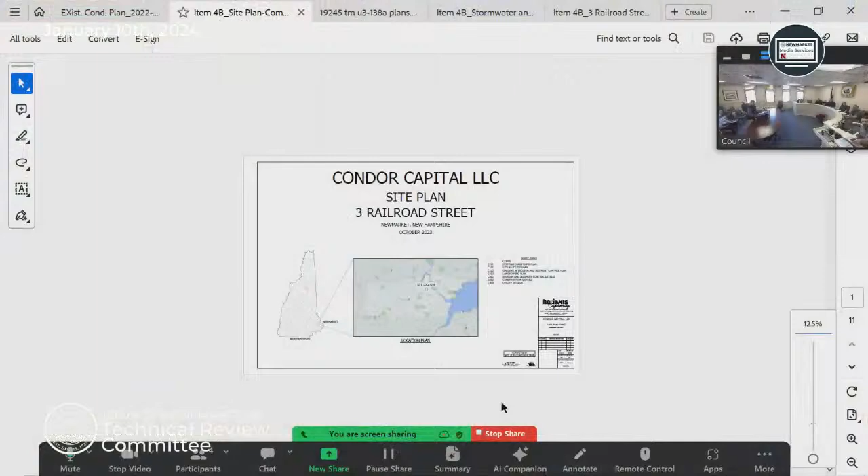Okay, again, I'm Brian Hudock with Horizons Engineering. So, yeah, thank you for the introduction. So, just quick recap. Effectively, we are proposing one new 3-story building that will have 41 one-bedroom apartment units and commercial space on the first floor. The commercial space will be used for the Horizons Engineering office that is currently operating out of the existing office building on the property.

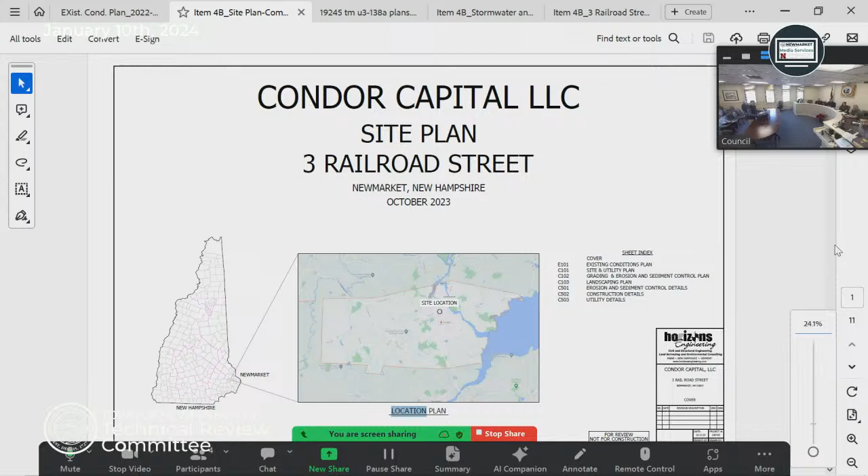As part of the development, the existing brick building will be removed in favor of the new building and parking area. So I think it's a very well thought out plan to optimize the space and account for all the various considerations. So we are compliant with all applicable zoning regs. There were previously approved variances in place to allow for the proposed density and number of parking spaces.

And as part of this, we are requesting a special use permit to allow mixed use within the M2A zoning district. And the special use permit has specific criteria, and I think we pretty well meet those criteria with our fiscal impact analysis, our market analysis, and the two other criteria, which is the parking and density. So I think it'd be an overall benefit to the community from those standpoints.

From a site design standpoint, we try to best work with the existing topography. So the building, while it is 3 stories, it's much lower than the surrounding roadway there on Main Street and on the upper part of Railroad Street. Some of the architectural renderings show that a little more visually. And then we also try to be thoughtful with how we orient the parking and the site design, and we've done outreach with the abutting property owners. And one of the comments, for example, was the reason that the drive approach is angled like that was to reduce off-site light pollution onto the abutters' properties.

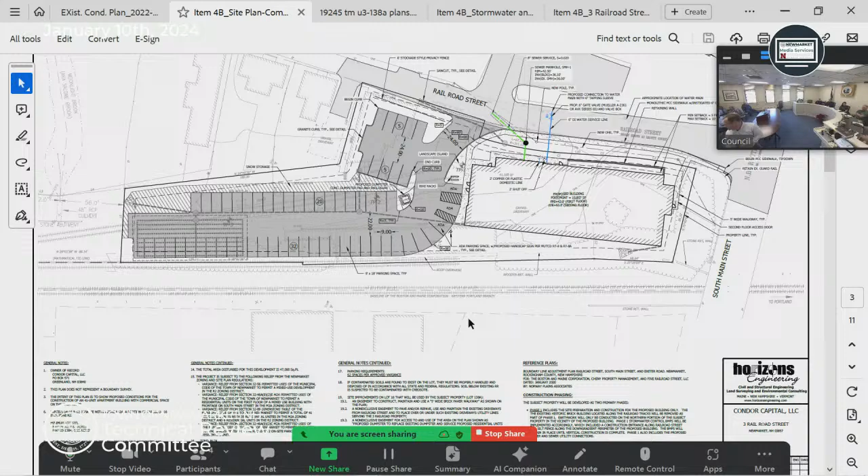Thank you. If you go to the elevations? You can go to the floor plans first. They should be the first architectural exhibit. Perfect. So on this overall floor plan, you can see we have our first floor and second floor, which is typical of the third floor plan as well. On our first floor, we have three primary entry points on this building.

One being on the parking lot side for the residential primary entrance. The commercial space will be accessed off of Railroad, and then our stair tower has an access point to the upper level of South Main Street. The idea being that this building has easy pedestrian access to downtown, knowing that parking is sometimes an issue. It was important to us to provide a stairwell access for residents to have a shorter walking distance to downtown, while primary vehicular access would be from the parking lot.

So visitors and things like that obviously would be using the front door, but for convenience, there's a second access point on South Main Street. Our commercial space has its primary entrance, as well as shared egress through the stair that accesses South Main Street. So the commercial space will go from its lower level up a half flight and then out to the South Main Street side. On the upper floor, it's purely residential units with utility space.

Our first floor has a utility space, which will likely be the water room with secondary electrical room in that space, accessed directly from the exterior. We'll be working with a sprinkler engineer, mechanical engineers and electrical engineers to further size those components, but that's where the allocated space is. First floor utility will be the riser room, electrical, mechanical. Yeah, separated as required, but yes. Then you can continue to the next page.

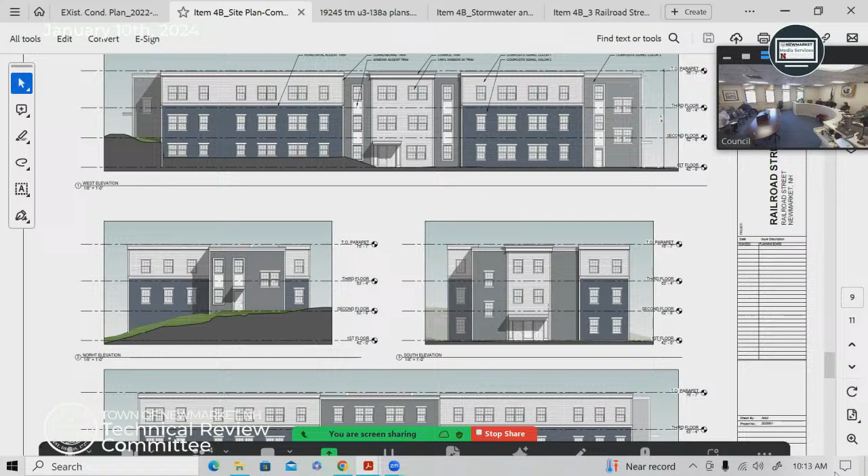We'll have to look at that. So it'd just be a new service off the main to a new hydrant. You're running the line already, you just put a T there. We may have to look at that, they'd be right next to each other. Off the fire service? Oh, we can't do that. That's one thing I looked at. It's a dedicated line.

Yeah, it's a dedicated line, and one of the other issues I saw is you actually ran your water service off that line. And you have to run a separate water service. So the water service actually has to come off the main, have a shut off at the property line, and then run to the building. It looked to me like you had it coming actually off the fire line, the water service. It was 2-inch.

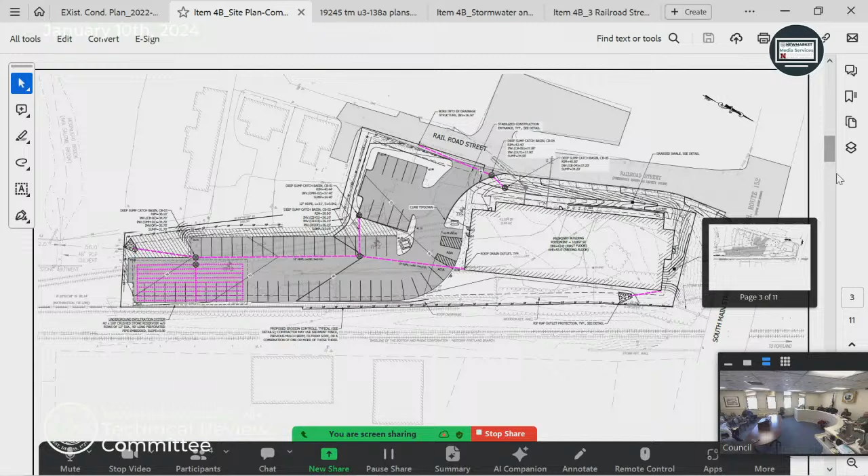Well, if we can just do architectural and then we'll get to that. Our understanding was to be a single 6-inch to the building that would manifold for fire. Right, that's what our last plan was, what was approved. Yeah, I know. Yes, you can't, that fire line has to be dedicated for the sprinklers. So you can't tap off it.

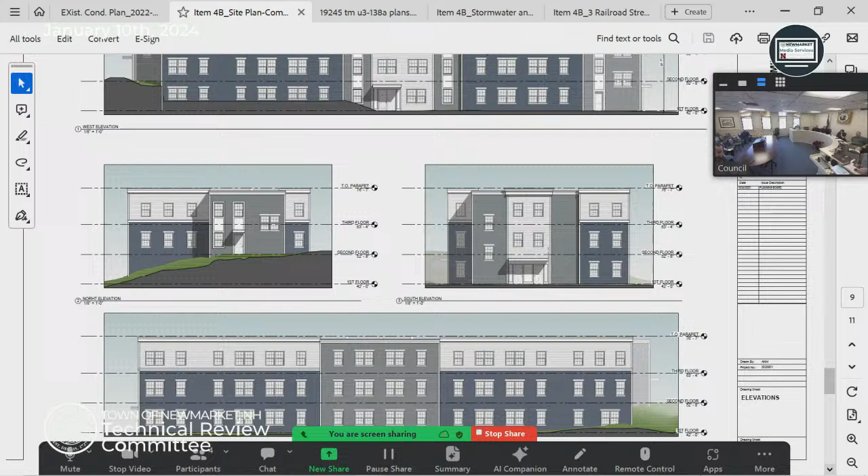Architecturally, our primary entrances have a similar language with a hierarchy of the primary entrances and then the pedestrian entrances being scaled differently. The rear of our building, which would be the railroad side, has a similar architectural language as the balance of the building, with the idea that this building will be visible on all sides. However, there isn't a primary entrance on this side, so it doesn't incorporate the exact same features that our entrances include. And if you have any other architectural questions, we'd be happy to answer them.

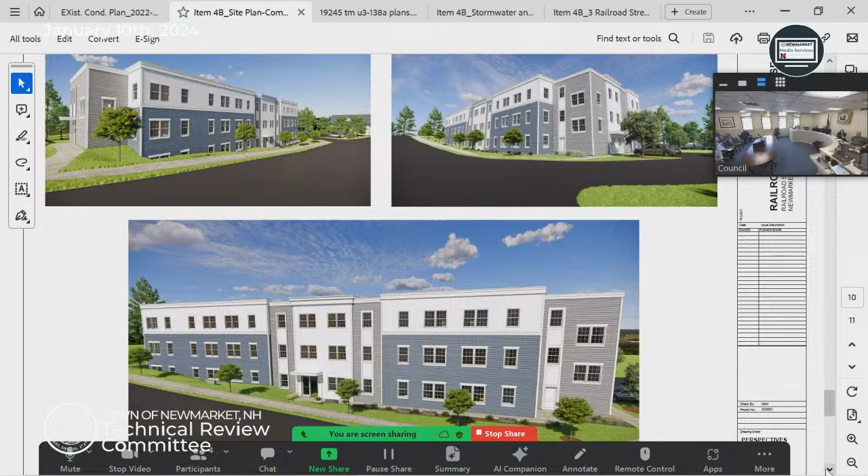And that main entrance from the commercial side is gonna go out towards your driveway for access. Correct. I guess we'll start in the room. While we're on the topic of water, we'll keep on having that conversation.

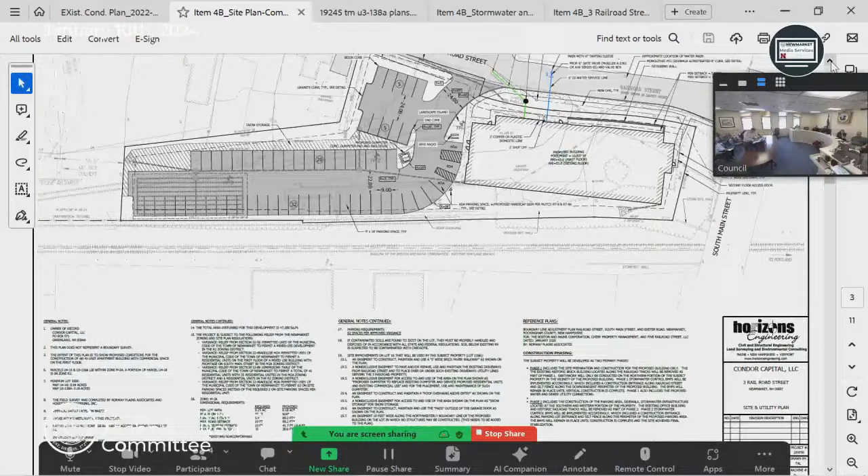So history on this side, we originally had an 8-unit approved here, and we were going with the same water sewer setup that was previously approved, but if you prefer having two water lines come in... It has to. Okay, that's not a problem. We can get that revision done really easily. Yeah, that's pretty simple. The fire line has to be dedicated to the sprinklers, and that's it. Exactly. And that's the problem, if you run a hydrant off it, you're drawing water, and water may not be getting to the sprinklers.

So with the discussion of adding a fire hydrant, we are gonna be adding a new walkway all the way up here. So we're more than welcome to work with the town while this is all dug up. It might be a good time for the town to add additional water lines down if they want to. Because we're bringing this walkway all the way up to this corner, so it'd be right across the street. This is gonna be all dug up.

So your sidewalk is at the curb line? We're bringing the sidewalk all the way up to South Main Street right here. From your driveway, it comes all the way down to our driveway. Along the paved road? Correct. So it might be a good time while all that's happening to add something like that. I have a question about that sidewalk, if you guys want to talk about it now. Sure, that's fine, Jeff.

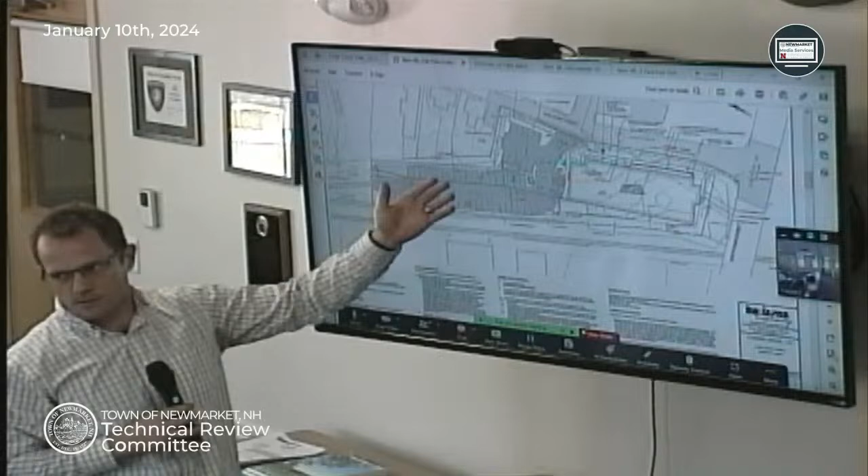Right. We were wondering about the office employees and visitors. I know the number of spaces is set, so that's not in question. But how many office employees are there? There's 6 office employees. Will any of these spaces be dedicated to the office, with signs? No. What we've talked about is we might put up some signs right here that say visitor parking from 9 a.m. to 4 p.m. But the second we start assigning spots, it becomes horrible. So the thought is, tenants are going to go to work during the day, and then the commercial space is going to come in and they can use those spots. Okay. Yeah, that was more of a question. Yeah, I think it'll be a good complementary use of parking. Okay.

Snow storage. There's not a lot of snow storage there. I just thought a note should be added to the plans to indicate removal off-site if necessary once it's at capacity.

Talked about truck turnings. If there's any pads for transformers, generators, HVACs, those should be shown on the plans. It's noted the bike racks are on a grassed landscaped area. I didn't know if that was intended that way or if you wanted the bicycles on like an extension of the sidewalk. Nothing in the regs about that, just a note. If there's going to be a sign, like for the overall building in Horizons, you should show the location of that.

Water and sewer services, I just noted we're deferring review until we have more information. Fire hydrant location, I noted coordinate with the fire chief. If there will be underground electrical or natural gas or any other utilities, those should be shown, even if it's subject to change. Yeah, no natural gas in Newmarket, so. Okay, you do propane, oil. Some towns. All okay. Electric.

Yeah, that's a good question. So, as you pointed out, the building's going in first, and the parking lot follows that in phase 2. So while the building is going in, luckily the footprint of the building is over a fair bit of existing impervious area. It's kind of hard to see on this, but on our base survey, a lot of that area, there's like a big gravel pad. So the building is not contributing a significant increase of impervious while it's going in first. But to your point, we can prepare like an erosion control plan and do some temporary BMPs.

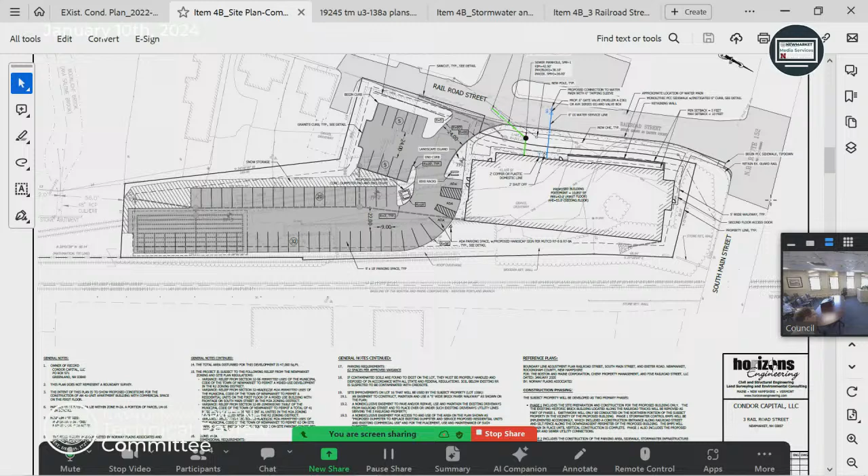Yeah, and with that said, I will do a calculation in-house, but my guess, so there is a shed down here that's impervious that's going to be coming out right away. I bet we are very, very close to keeping impervious the same exact amount during construction. We're happy to rip up the pavement while we're under construction. One thing, talking with the neighbors when we met with them the other night, is they're happy that this building is staying during construction because it's going to be a buffer for them, so they don't have to deal with noise and just seeing construction. Okay, I just wanted to make sure that there's somewhere for it to go before the underground is built.

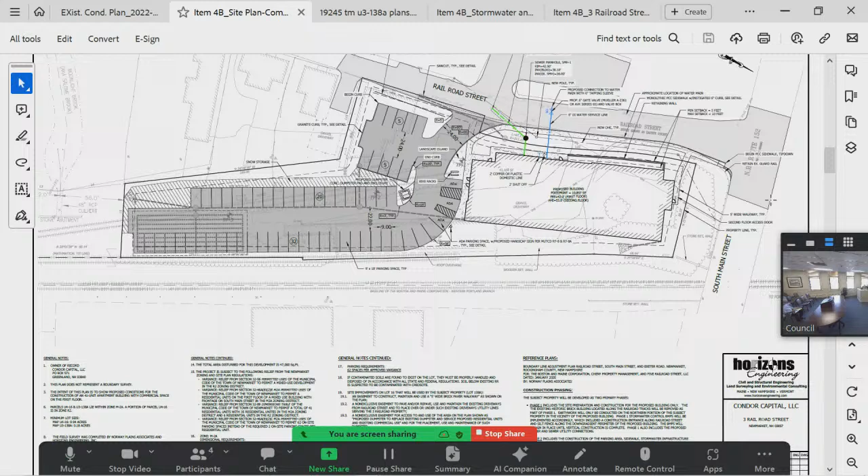Yeah, I want to piggyback on that too, because that was one of my comments. Some sort of like temporary sediment basin, because during construction, while the impervious surface may be the same, it's very different when it's exposed soils. So that shed area, the shed's gonna be taken out, and that could be a temporary sediment basin, just making some notes that stormwater from the active construction area could be directed to that during construction.

Yeah, definitely. We can make almost like a dedicated construction erosion control plan that just shows the construction phase items and BMPs, not all the other details, just so it's kind of clean. And we can also support it with some calculations too, with the impervious area. Okay.

Let's see, some more things about notes. Notes about dewatering, it says you have a perched water table in there. I suggest a safety barrier be added to the corner of the parking that has a 2-to-1 slope. I'm not saying a guardrail, but some sort of safety barrier. Is that that last space in the southwest? Yes, right there. I was gonna say right by the underground basin. There's just a little corner of 2-to-1 slope that starts right at the pavement.

Yeah, I think we have a fence called out. Okay, oh, that's true. I didn't have the landscaping plan until I got here, so maybe it already shows it. Yeah, there's a fence that comes all along here, and then it's gonna shoot up this way too. And then I believe there's a fence straight across here to block any light pollution from people pulling in, going out onto these neighbors. And then there's a fence right here as well. How tall is the fence? So there is a 6-foot fence called out.

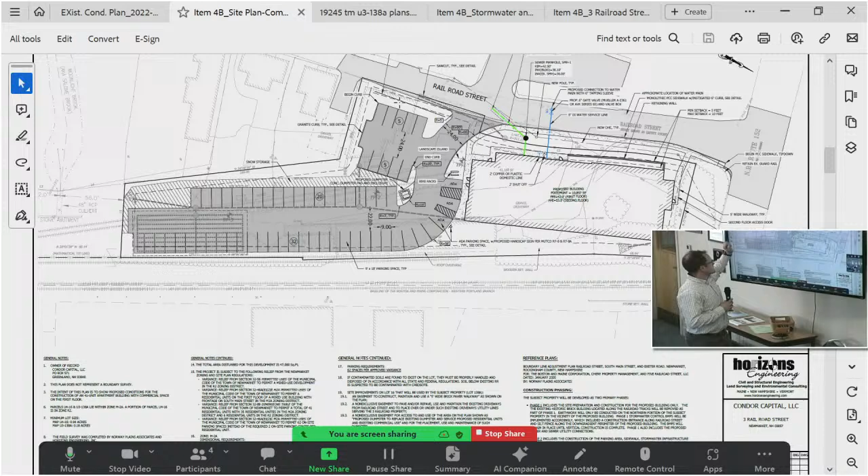Or it's probably, do you have the landscape in this? Oh, this is right. Okay. This is a 6-foot vinyl fence right here. I believe it's, I think it's a 6-foot all the way. I think it's the same from what I recall. I don't think there's two different.

4-foot-high black vinyl-coated chain link. This one? Is it all the way around? So this is 4 foot with shrubs, and this is 4 foot with no shrubs, you said, here? Or this is 6 foot high here? This is 6 foot, right here. Okay. Yep. And then this is 4 feet, yep, that goes all the way around.

Okay. Yeah, so the goal with this one is just for light from tenants, so it doesn't go into these backyards right here. And the same with this one right here. To Allison's point, though, the fence doesn't go around that. I know it's also a snow storage area, but it's a steep slope, so bollards or something that can prevent. Yep, that's a good idea. We'll add that. Okay, and then the rest of my comments on the plan set are minor, and I don't need to bring them up now.

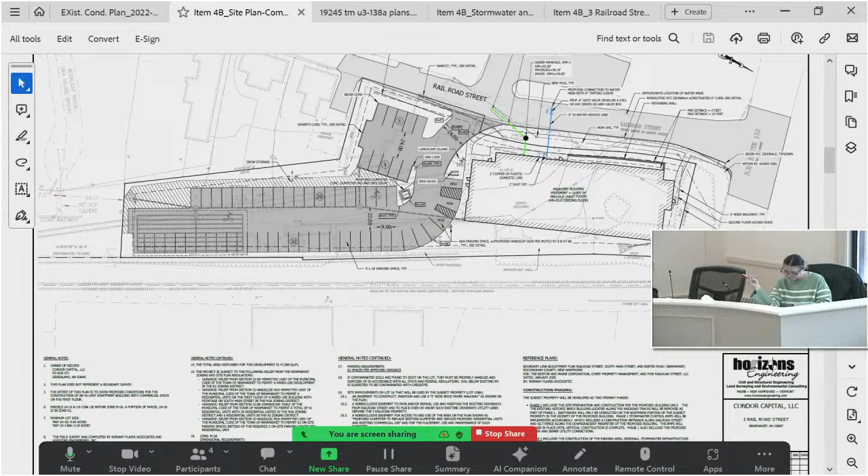The stormwater modeling, please provide more information about pollutant removals. I think you had like one sentence in there, and that was it. Show the flow paths on the subcatchments. I haven't actually really finished looking through the stormwater model yet. I can add a few preliminary comments on that. And I was asking for some pipe sizing calcs for some of the discharge pipes.

I saw that the test pits weren't super favorable, but at least I did see that where you have the underground infiltration, that test pit was one that didn't have that barrier. Correct? I only had like a few minutes to look at it. Yeah, I'd have to look at it. Off the top of my head, I can't remember. And I'll look at it more too. But yeah, we can address that in the report and vet that out so we can provide more information to show that it's adequate.

Okay, and I did see you're proposing a municipal storm connection, so you'll need to request a waiver for that. And that was it for the bigger comments I had. Yeah, while we're on the drainage piece too, the connection to the existing storm drain out there, really need to have some more information on how that's gonna work and confirming capacity. There's no information about the size of the pipe or anything there.

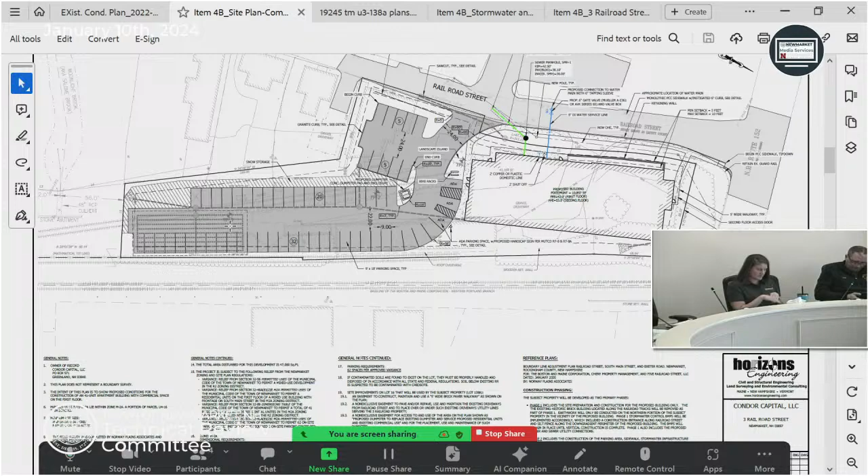And a sort of minor comment, but I feel the need to say, the little riprap apron that's shown at the end of that outlet that's going down the stream, there's no information on what the invert of that pipe is to show how steep that is. You're probably going to get some significant velocity when you do have the higher flows coming out of that, and that apron is supposed to be running parallel to the pipe discharge, so it doesn't discharge out the side of the riprap. Yep, just maybe a graphical thing.

Okay, yeah, drafting, but just making sure that that represents and actually fits within the property. Okay, yep, we can provide more details on that and some flow calcs for that discharge point. Or I got a couple questions on drainage. Now's an appropriate time if everyone else is set. Absolutely. Go ahead. So, it's the same area.

My concerns in that corner are, obviously, it was already mentioned that the grading crosses the lot line, but it also appears to go into the pavement of that neighboring property. And presumably the water must flow off that pavement, maybe around the end, and you're kind of blocking that corner, so it may cause water to flow out across that neighboring parking lot.

And then the discharge pipe that they were just discussing, it comes out kind of parallel to the slope. It doesn't seem to me we have enough contour information to know when it breaks down towards the stream over there. Is the water going to come out of the end of that pipe and then flow perpendicular to the slope and right down into the parking lot on that neighboring property, or is it going to continue on to Moonlight Brook? It's going to continue on to Moonlight Brook, and we can provide some additional detail on that discharge point.

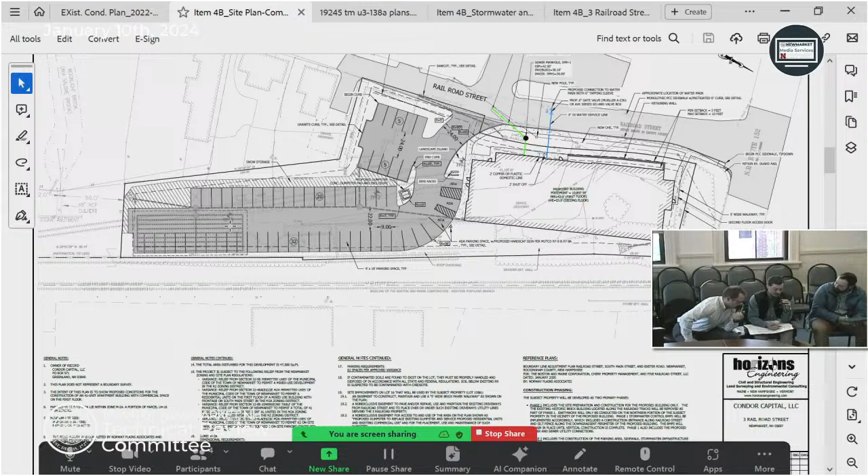I think maybe the drafting, the 2D layout is a little misleading there. And you're right, we don't have contours showing that area, it's kind of the limit of our survey, but we can provide some additional info. But basically, it starts going down towards the brook beyond that point. And just last point on that discharge, it's almost like an emergency discharge. It's only for the higher storm event, I believe just for the 100 year. So it's not something where we'll see water very often.

And then to your first point about the driveway, I think there are some lines on the plan of existing conditions, and that might have just been a CAD oversight. But the driveways are on the opposite side. Those are like the backyards, so to speak. It's just kind of grass landscaping back there. I believe that's not parking for that multi-unit building there? No, it's not. I can update the plan and make that more clear. But I can see how it looks that way. Yeah, aerial imagery makes it look that way. This is the plan saying edge of pavement right there.

My other drainage question is at the northeast corner of the building. There's another riprap outlet, and there's no pipe sizing or what's the source of that pipe that's coming out of the northeast corner of the building? That's just roof downspout. Is it a substantial portion of the entire roof that would go out the same outlet? No, I don't believe it's the whole roof. Let me check. We delineated the roof drainage, and we can show that on the updated plan, basically the stormwater flow directions off the roof and how much of it goes to that downspout. So we can provide additional information on that downspout.

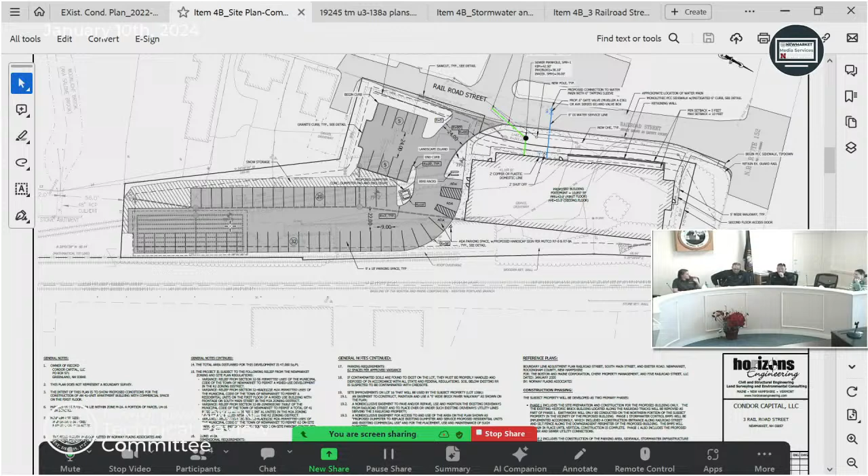And if you have any suggestions on this fence. I like the idea that you have a fence. There's nothing there now, so it's open. Prickler bushes would help prevent it. Yeah, plant those. I think that's a good idea, probably the best you're gonna be able to do. I wouldn't be a fan of a gate. If it's not gonna be locked, I think it's gonna be a problem. Okay, don't do it. It's an invitation. Make them have to walk around and really work to do it. I like the idea that you're putting that walkway to South Main Street, so that might alleviate some of the desire to cut through that way.

No problem, a gate just costs more for us. Our thought is, this is all grass area back here, so if anyone has a dog, this is kind of gonna be the area to get the dog out to go to the bathroom. We don't have it called out, but we're gonna put a pet station right there, and that's where the dumpster is gonna be, so all the pet waste can go right there as well. Okay, all right.

Yes, thank you, Chief. Yep.

Abby, any questions? Just on the dumpster, it's not gonna affect any of the parking, just for tenants? No, or just the access? The dumpsters we're using, what the dumpster company will have to do is come physically pull it out. Okay. It's a rolling one, and they'll bring it down into the parking, pick it up, and then move out. It's not like they have to pull in and do a full dump one. Yep. And again, the neighbors were happier that we were doing those ones because it turns over a lot more, instead of having a larger dumpster that can sit there a little bit longer.

Is the only communal space out back, is there anything internally as well? There's nothing internally, no. Okay, so that'd be the primary area people would interact outside. Correct, yeah, and I think the real goal for this is kind of why we added the door up here: you're walking distance to downtown. You can walk, it's trying to activate downtown more. So this is more pet, we might throw a couple picnic tables up there, but the real goal is to continue to activate downtown. Thank you.

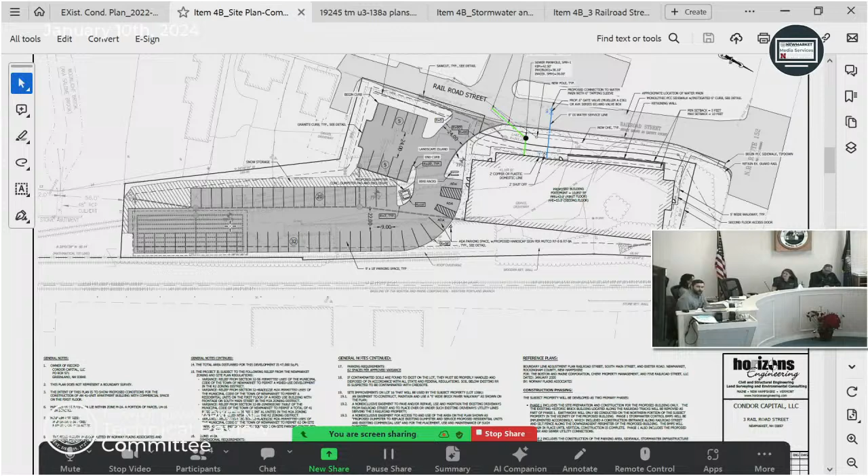No, I think we covered mine. Okay, Rick? All set? I'm good. Allison, any final thoughts? No? Eric, any final thoughts? Nope, I'm good. Great. Jeff? Bart. Oh, yes. Actually, hey Bart?

Yes, here. I do have one thing, we didn't really talk about it, but just so they're aware, when I went through the information before the planning board meeting, the traffic study was done by a company out of Maine, and you're gonna need to make sure there's a New Hampshire PE stamp on that. So they're also New Hampshire, they just stamped it with the wrong stamp, so they're going to put the New Hampshire stamp on it. Thank you. Great, thank you, Bart.

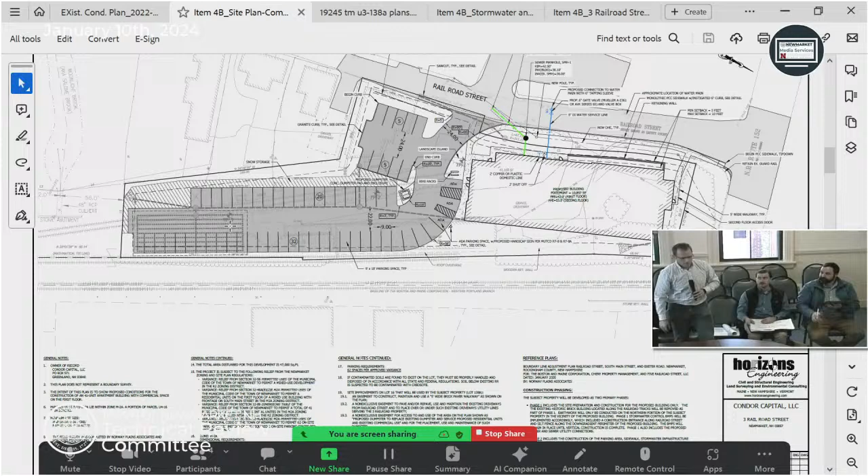Jeff, any final thoughts? My only final thought would be that the commercial space is going to be fully usable by the time they need to tear down that other building. Other than that, I'm all set. Thanks. Yeah, our thought process with that is to phase the occupancy. So we'll go for a certificate of occupancy for the commercial space. We'll have all life safety in place, and we can start to move over the commercial space during that. And then we will demo once they're in, and it won't disturb the commercial space.

So just like an updated sequencing plan. Yeah, and we can update that. I think that's going to be the best way. We're going to put a lot of our construction time onto that commercial space to get it complete as soon as possible, so we can phase into the demo of the existing building.

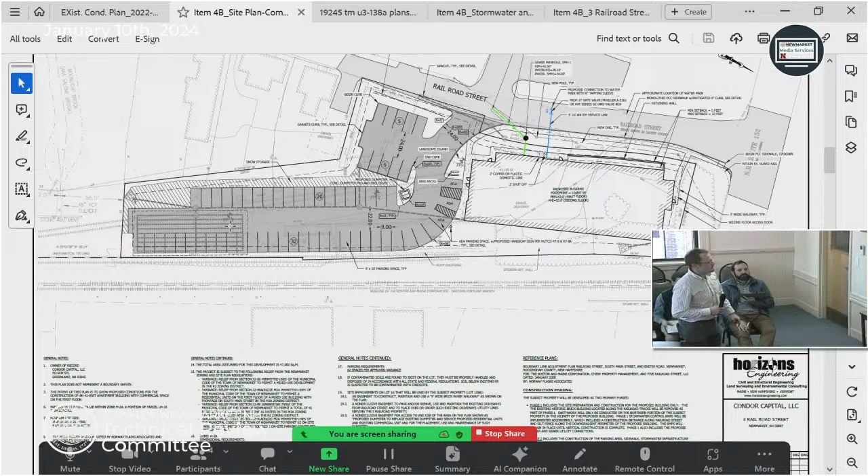Actually, sorry about that. I did not see the variance for that. Could that be used for almost any commercial use in the future? Yeah, and just to be completely honest, Horizons did just sign a pretty long-term lease with us, but if they were to ever move out, that would become a fitness room and a communal space. So the commercial element would go away, it sounds like. I'd rent the gym to you.

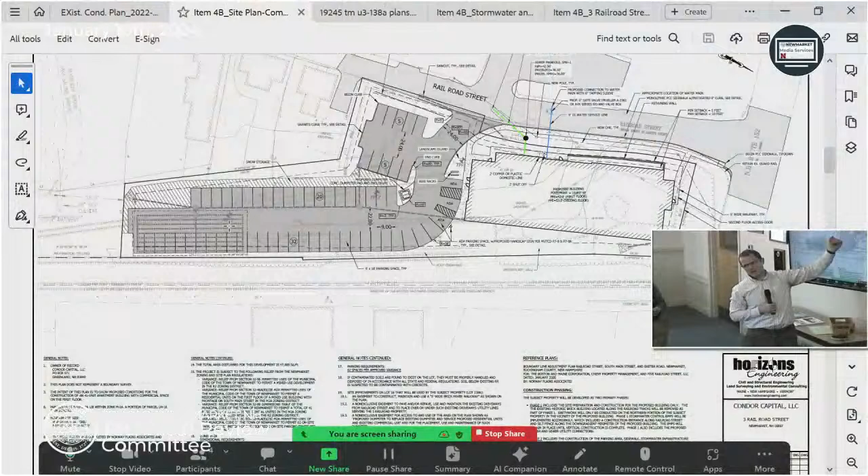Just another one. If they're working in there while the rest of the site is getting developed with the underground system, are there enough spaces across the street for all the employees to park while they're working on this space? Right. Yeah, we'll probably have base down, so they can park on base while they're doing it. If you look at that lot during the day, it is empty. Right, actually, just before I came here, I pulled over there. They rent spaces there overnight, but during the day, with three cars in it, it is completely empty.

And if we do run into parking issues during this, we have a good relationship with this apartment building right here. We can look at leasing spaces during the day for the employees. Parking isn't an issue right around this area during the day. It's kind of nighttime.

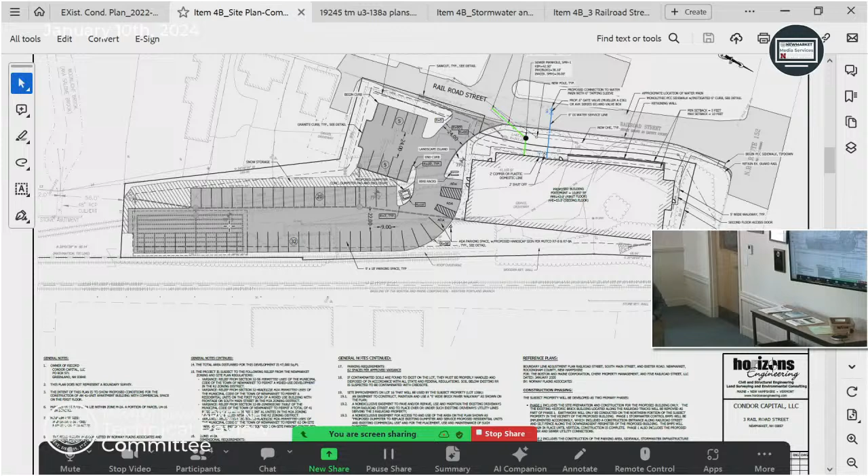Well, sounds like that's it. So I'd like to thank everyone. We'll conclude this review, and we'll have the notes sent to you as soon as